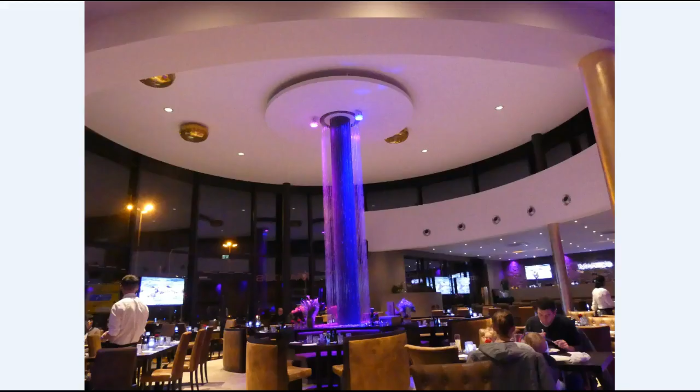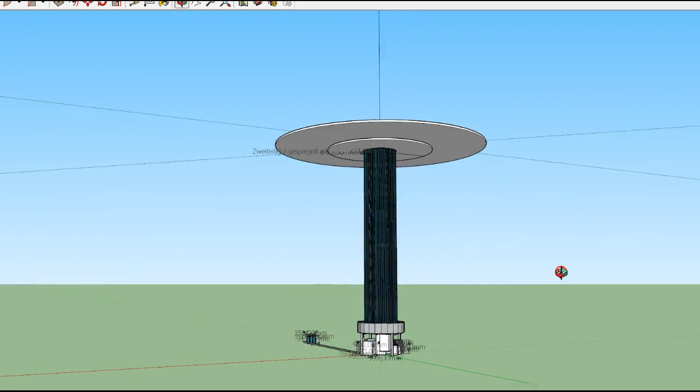Hello again. This is the second part where I want to show you the process of producing this thread fountain. In this part, I will show you the sketch we have produced before we started the production. So we use this sketch to talk with the architect and with the owner.

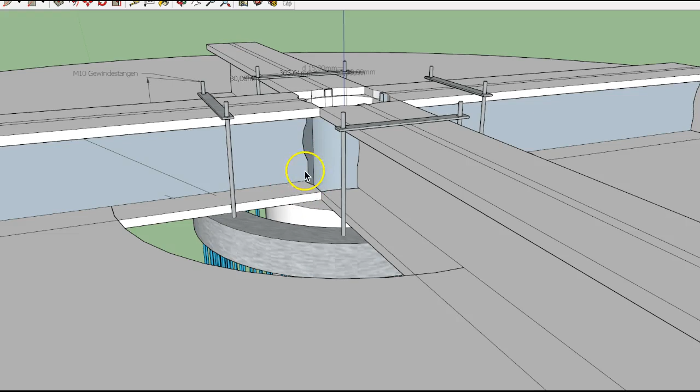As mentioned in the first video, one of the challenges was how to fix the water distribution circle at those metal parts at the top, and what we've used are those studdings, which work pretty good. I will show you in one of the next videos how we did this in detail.

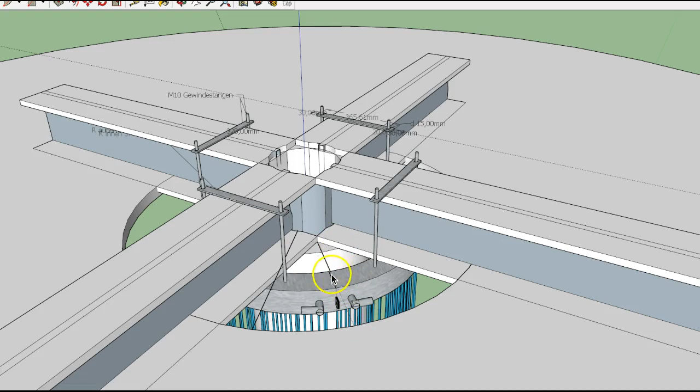And what happened from the customer side, he put a drywall pillar around the original pillar, so we have some free space in here where we could place some hoses, some pipes to get the water up here hidden below the drywall.

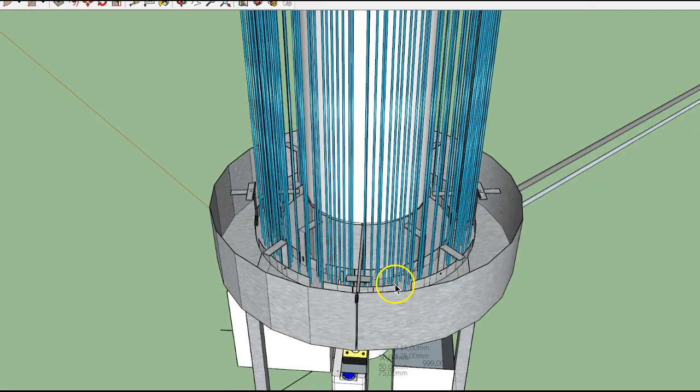And what we then did, we pumped the water inside those two half circles, and then the water flows down on those threads inside the bottom tank, which is also made of two parts. Actually, the real challenge was to make a two-parted bottom tank which is waterproof. But because we have those threads, it wasn't so hard because we just had to divide those threads.

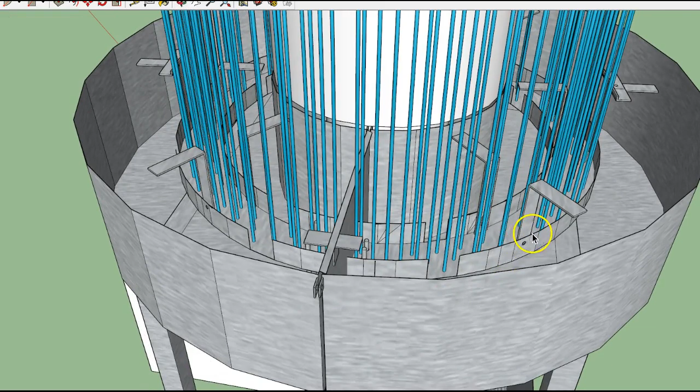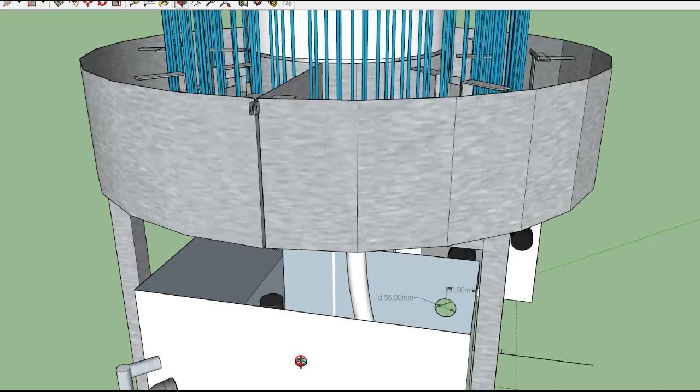And those threads have been fixed here in this profile. So the water went down the threads inside of one of those halves. And then from those halves, with a tube, it went down to the tech tank. In the tech tank, we had two pumps, and those pumps then pumped the water below the drywall up again to the water distribution circle at the top.

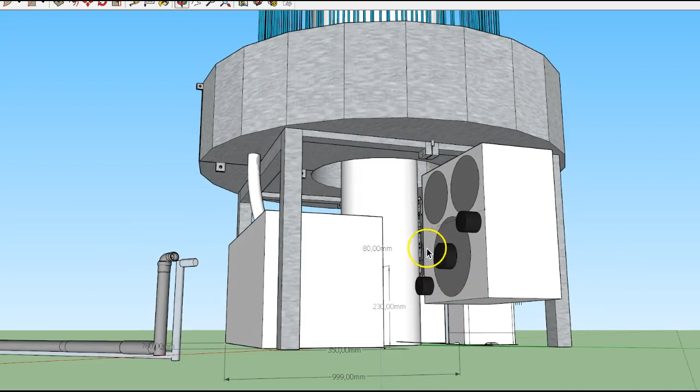And down here, what you can see is we have placed a dirt filter. So everything was pretty narrow down there, but it worked. And here you can see the metering unit for the water additive, and we also connected this to the tech tank at the bottom.

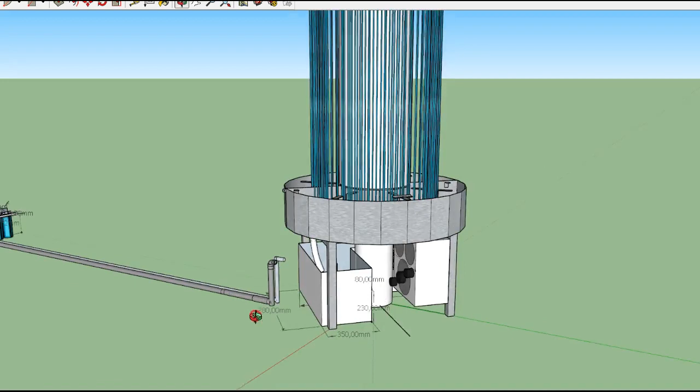And what you can also see here are the two tubes we had below the floor. One was for the filling, to refill the water wall, the thread fountain, with fresh pure water coming from the reverse osmosis, and the other was a connection to the drain,

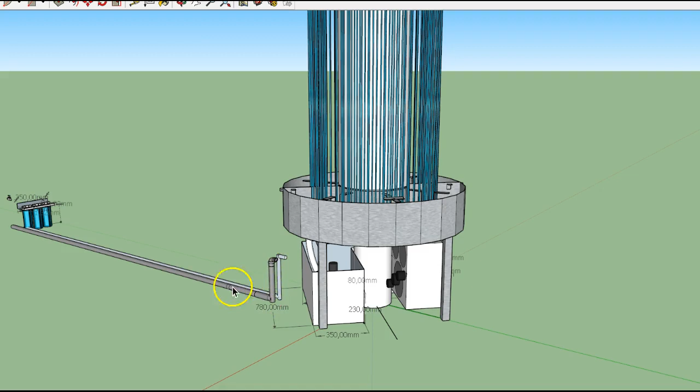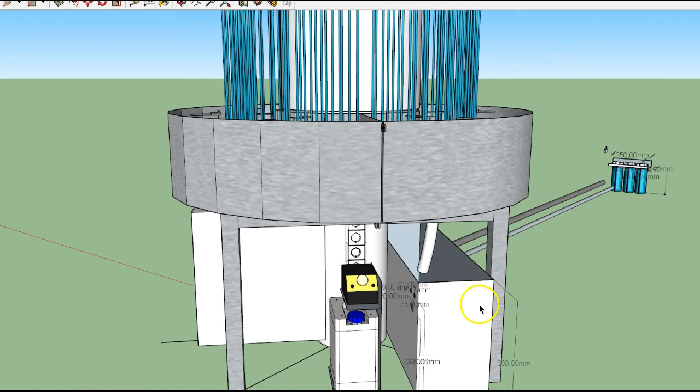so that we would have a security overflow. I think it's not in this sketch, but what we had in here is a valve, a float valve, which would open when the water level sinks. But if the swimming valve would block or would be broken, then we would have the danger of water damage, because the water would then come out of the bottom tank.

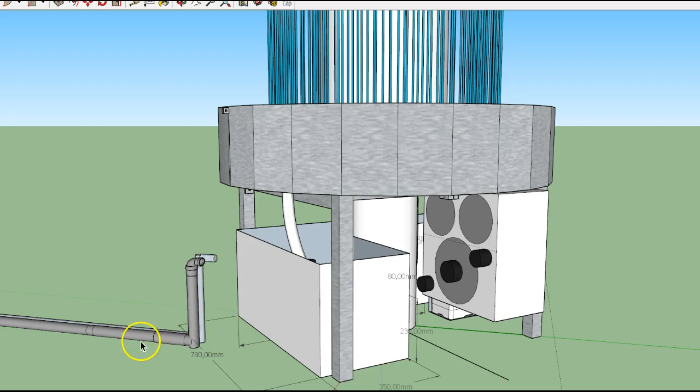And so what we did is we made a hole in the tech tank, so if the swimming valve would be broken or malfunction, the water would not overflow here on the floor. It would overflow inside this drain tube, which is then connected at the other side behind the bar, as you maybe remember from the first video.

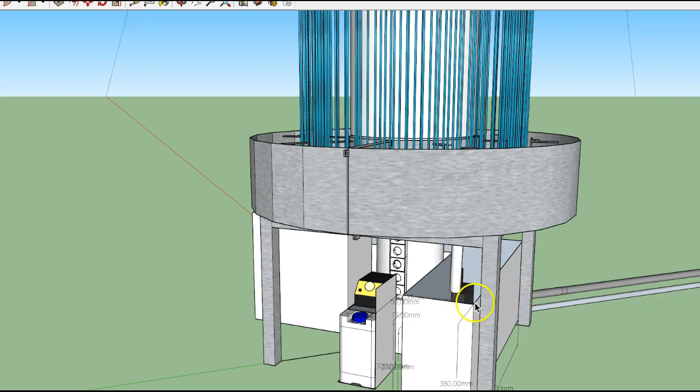So yeah, this is the main principle. We have a bottom tank which collects the water. The water then is driven to this tech tank below it, where we have the pumps, and inside the pillar there is some space, and then we pumped it up to this water distribution circle, which consists of two half circles.

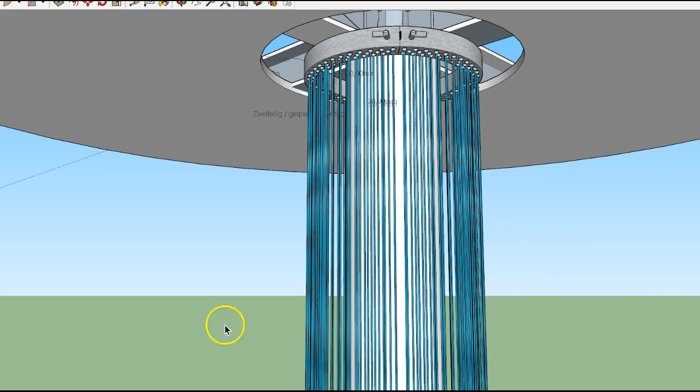And in the next video we will show you the production steps we had, and also the testing phase, and some other nice things which I hope you will enjoy.